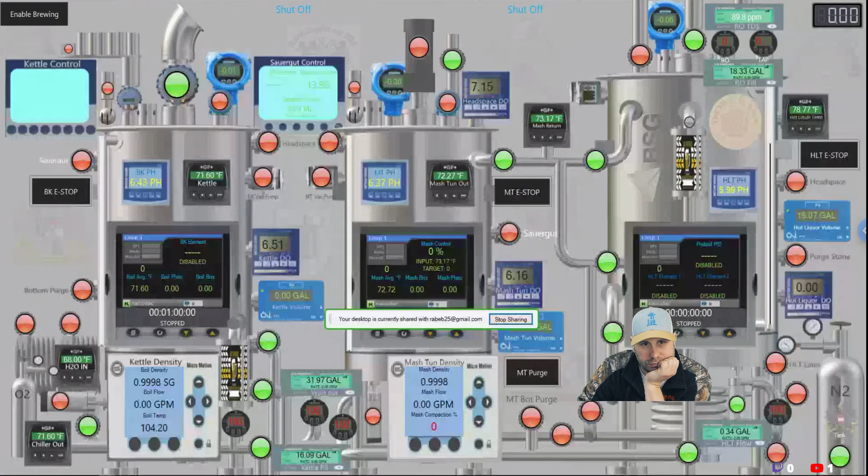Hopefully everybody can see that, I think you can. You can see my cursor, I believe, as well. So this is the brewing interface. Every one of these little guys right here is a valve. Green is on, red is off.

We have DO sensors pretty much everywhere, in the headspace and in the middle of vessels, so I can track DO. In the hot liquor tank right now, there's 0.01 ppm of DO, or 10 ppb, so that's 16 gallons of deoxygenated water.

We might have to change some things. Actually, I think we'll just go to a no sparge batch, just because it's much easier. There's between 0 and 10 ppb of DO in the hot liquor tank. The hot liquor tank also holds a HERMS system.

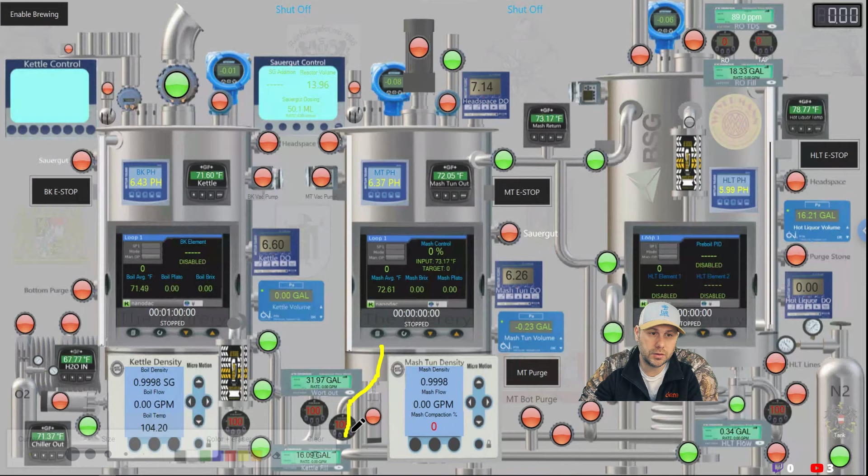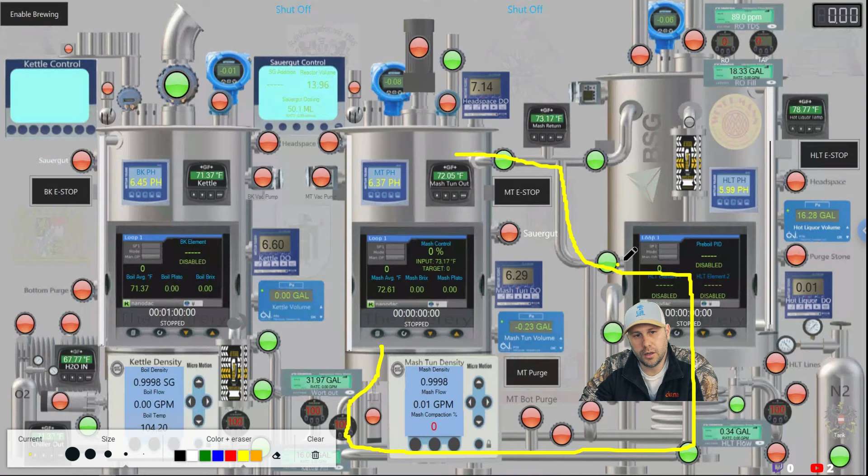The second loop of the mash tun takes the same path, pump out to a proportional valve so I can control flow through the mass flow, and then it forks. There's a 3-way valve that forks and can bypass the Herms. So I have 2 loops running basically at the same time, and this valve allows it to go either to Herms or back to the mash tun, so I never exceed temps. I never have to worry about that, and it works really well.

There's multiple temperature probes. There's one on mash tun out, right here. There's another one at mash tun in, at the T of the bypass valve, which tells us our wort temp. Then I run an averaging script between the top and the bottom that tells me exactly the differential between the two, and I try to get those as close as possible to stop stratification and all those good things.

The mash tun does have its own stir motor. This motor comes down and acts as a rake, which that's a horrible drawing, acts as a rake for dough-in and things like that to homogenize temperatures. So there's a hybrid in that.

All these vessels are sealed and pressure capable. They have pressure sensors in the top and bottom. These differentials also tell me the potential of a stuck mash or anything like that. That is this mash compaction right down here, which is based on flow and compaction here. So that's a neat thing.

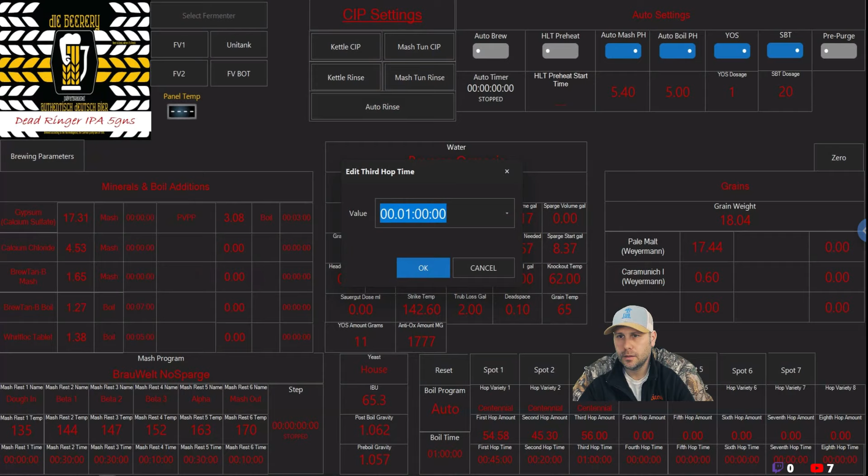I need to change this quick. How do we want to do that? See how this says third hop time an hour? That's not right, so I'm gonna just run back over to BeerSmith. Actually, I can just, for now, edit it here. So we want this guy off here because this guy was a dry hop, so that's gonna screw us up. So we want to delete that guy. Actually, let's cancel that, let me move this guy over here. We want to delete that. We want to delete that. And we want to change this guy to 0 right here.

Okay, all right, because this, like I said, this is just hot side process for today. We worry about that in a different area. So how this works now is, you can't see a cursor, I think I can actually, let's see here, doesn't allow me. So remember I told you about this little guy up here, select fermenter. So the cool thing that I built into this system was...

Give me a second, Jeremiah, okay? The cool thing about this BeerSmith import and the way I set up my automation is this one import takes me from brew day to the keg. Well, to serving actually. And so there's these little guys that help follow the recipe along.

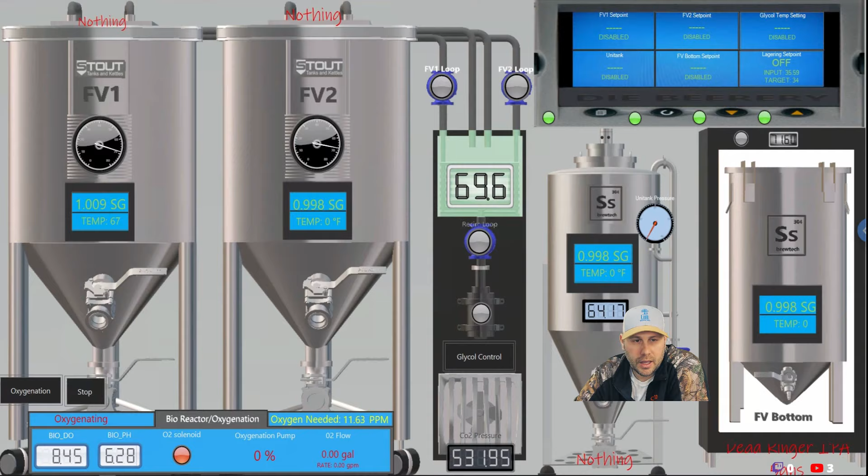This little guy now says the beer. And when I'm ready to start fermenting, when the beer is in the fermenter, which has its own tilt and volume and all that kind of stuff, it'll auto set the fermentation temperature. It'll know when to transfer over to the spund, so it'll alert me and all that. The spunding chamber is where I naturally carbonate all my beers—I brew German beers, so I naturally carbonate all my beers.

And that's via spunding. So it knows exactly when to alert me to transfer over to spund based on the gravity, how many gravity points, the desired carbonation level, all that fun stuff. You can see I have a beer spunded right on the left chamber. I have 4 different spund chambers that I can do.

There's digital pressure gauges, industrial pressure gauges on there that give me a readout. Right now I'm at 14.5 psi in this lager at 53 degrees, and that's a Pils. So it knows the exact pressure to set the spund. There's an electronic PRV on there with a needle valve, so if it does go higher, it will blow off that pressure slowly and then close the PRV and then maintain.

This dip right here, I pulled a gravity sample last night. So that beer will go into spund chamber number 2, where based on temperature and carbonation levels, it'll auto carbonate itself. It'll also keep track of the purge count and how many times the PRV opens and all that kind of stuff.

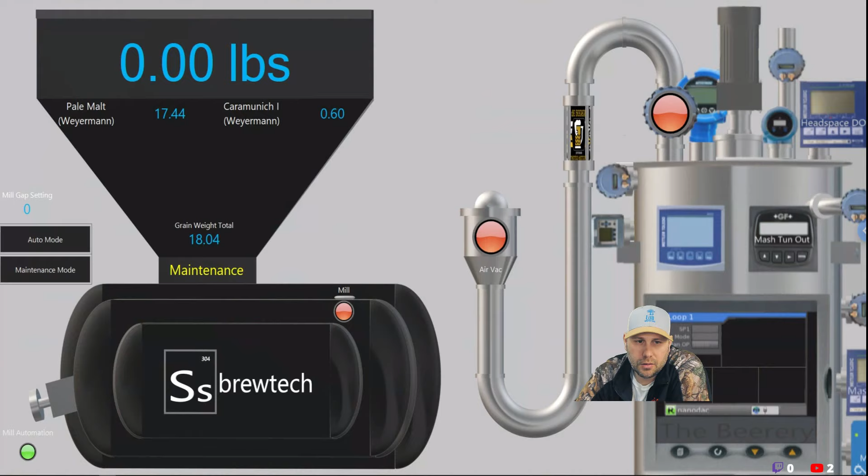I'll go back to the brewing side right here with our data, but we'll go back to our main page and get ready to start the brew. Jeremiah did have a question—how many grams of gypsum and calcium chloride? For this beer, it's 17.31 grams of gypsum and 4.5 of calcium chloride. Hopefully that answers your question. Basically what I'm going to do now is get up, go get that grain ready, and we will start the brew day.

The first thing I'm going to do is go back to the brewing, and since we are going to actually brew today, we're going to go up to the top left corner and click Enable Brewing. That's going to shut all my valves and get us ready to start to brew—a clean slate, no valves open except those that need to be. We have an interactive screen here: press Brew Start to begin, and awaiting purge commands. So with that, we are going to actually click Brew Start because we do want to start.

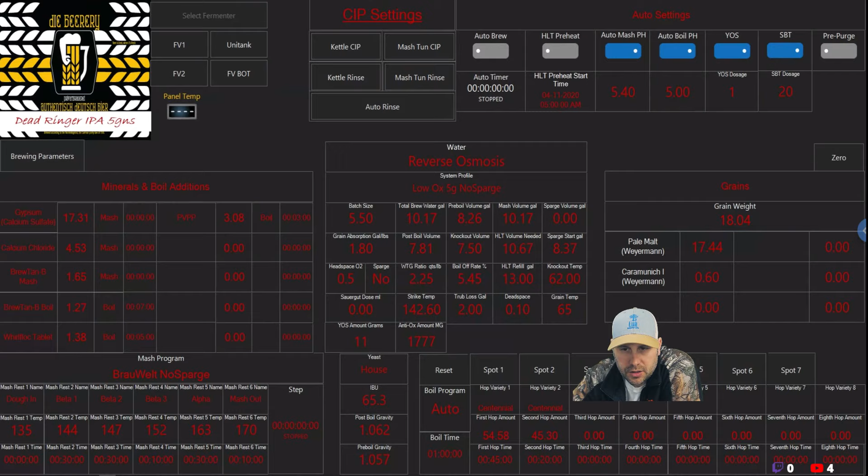So it looks like we're going to be about 65 IBU, post-boil gravity of about 1062. We're going to boil for an hour today. Our first hop addition is at 45 minutes, our second is at 20 minutes, and we will be doing a dry hop. Here's our kettle additions and our mash down in the left-hand corner, which is a step mash. Yes, I know I'm brewing an IPA, but I don't change my mash regimen based on beer style.

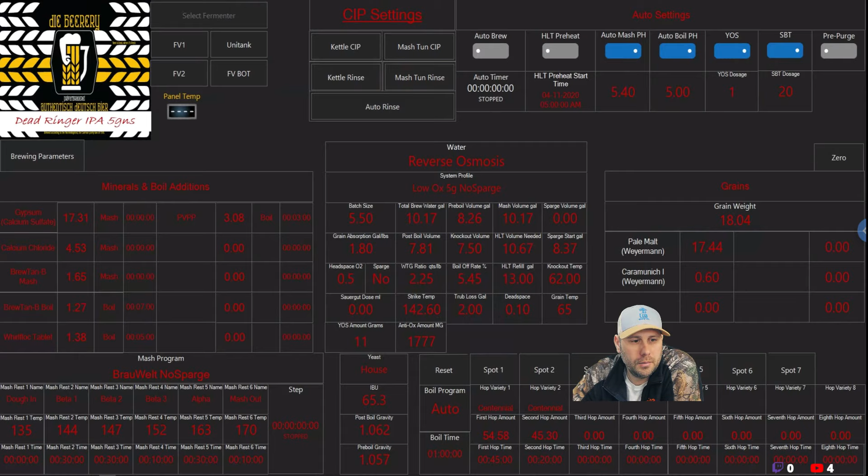So if that looks good, then what I have to hit is brewing parameters. Once brewing parameters are hit, all this data is locked in the brewing controller, and it's going to start asking me things like, am I ready? Yes, I am. False bottom - false bottom is in. I have forgotten my false bottom. You'll notice that I'm kind of a dumbass and I forget a lot of things. So that's why I built an automated brew system to make sure I am less of a dumbass.

Hey Paul, just saw your question. Well, I already have bins, and my thought process on my grain automation is I'm just going to use load cells like I do with the mill, and then these air vacs, which are basically little vacuums. You could basically use a valve, open the valve, put it on the bottom of the grain bin, and then once the valve opens, turn on the air vac and pull that grain out, and once that load cell reads the registered weight, we're good. So yeah, it's more than on the radar - we'll call it alpha testing right now.

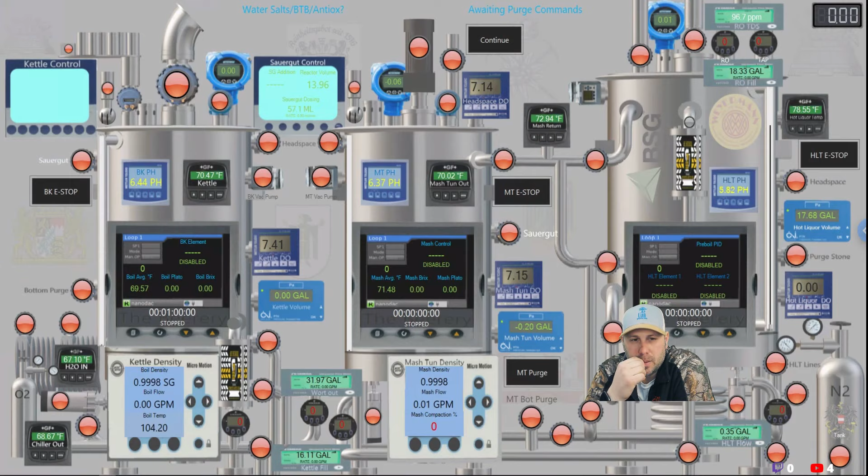I think somewhere I can give you a look inside of the brewery and what I'm doing. Today I am not using the grain delivery system, so I'm going to do that more manually. I'm looking at some different options, so it's kind of torn apart. I'm going to go to a bigger diameter pipe - I'm at 1 inch right now, but I don't like it. I'm going to go up to like a 2-inch diameter, so I have that kind of taken apart. It'll be a little bit more manual today, but that's fine. It's not like I got anything else to do or anywhere to go.

I'm going to go back there. I'm going to see if I can give you a view into the brewery while I am doing this. So let's see here... just bear with me while I do this. I just got to pop back. See if I can grab it here. There it is, let's see if I can make it bigger.

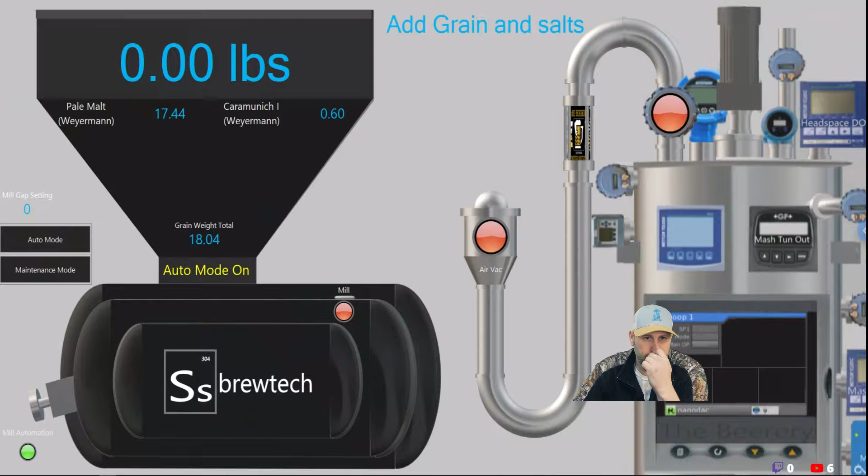Let's go and shut this guy off. So right now I am going to go actually start milling. I'll cut you back over to that stuff, let's see here. I'll cut you back over to the cameras. I have it weighed out already, I'm going to load it and start milling. So I will be right back.

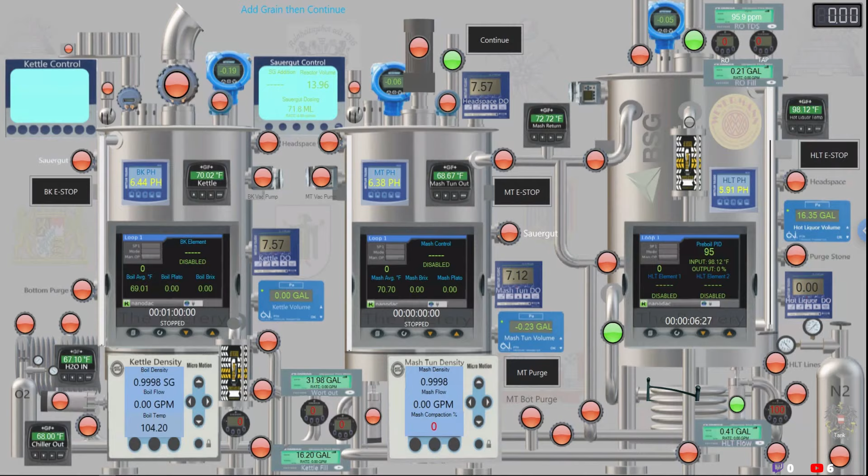All right, we're back. So grain was added in this case. Now we are just going to wait for our purging of the grain and purging of the mash tun, as you can see. Let me get my interaction here.

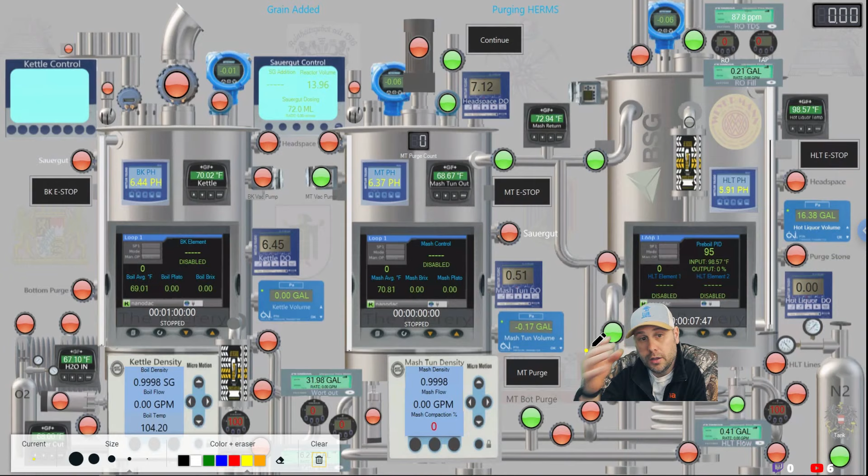Gosh, I'm getting a little glitchy here.

So it's about a 60-second purge to purge all that tubing. It's going to auto do it. Here it's purging the bypass now. So it purged the coil and all the herms with that.

We're pulling a vacuum as we're purging because it's coming out and being dumped back into the mash tun. So we're pulling a vacuum as we're doing that, pulling out DO. We're just trying to make the most efficient use of the purge gas, which in this case is nitrogen.

So we are now purged. All our lines are purged. This is a sealed vessel. Everything is sealed.

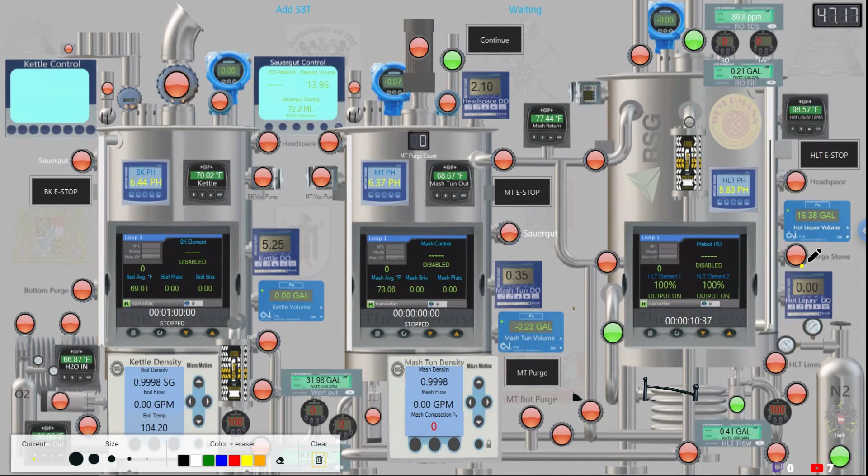All right, cool, so I added that. Now that that's added, we are heating to strike temp. Strike temp is going to be roughly 140 degrees, somewhere around there. Our temperature right now is 99.

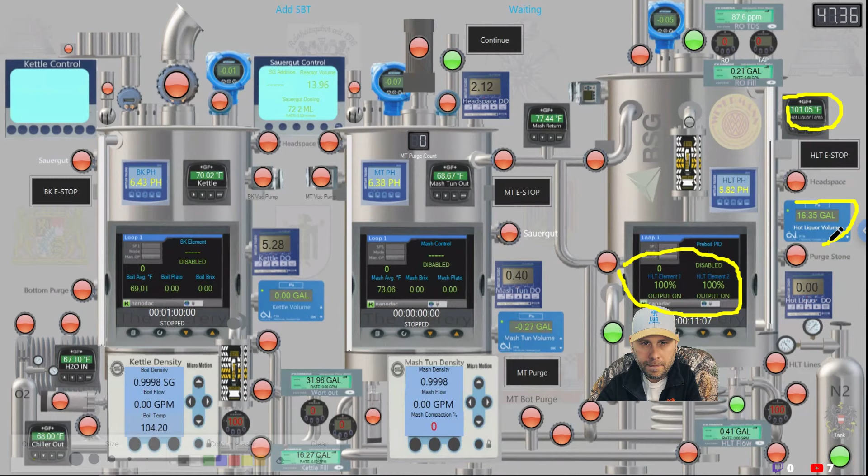We have two 5,500 watt elements in this hot liquor tank. This is a 30-gallon hot liquor tank, so it has 11,000 watts of heating power in it. It's half full right now, and we only need 10 gallons out of that, so no big deal.

What we're going to do is underlet those 10 gallons just like this into the mash tun, like that. And once we do, we'll be left with 6 gallons. I need about 13 gallons to cover my herms coil. No problem whatsoever, because I have an on-demand water heater fill valve right there, and it's going to come out at about 145 degrees. We'll be off and running.

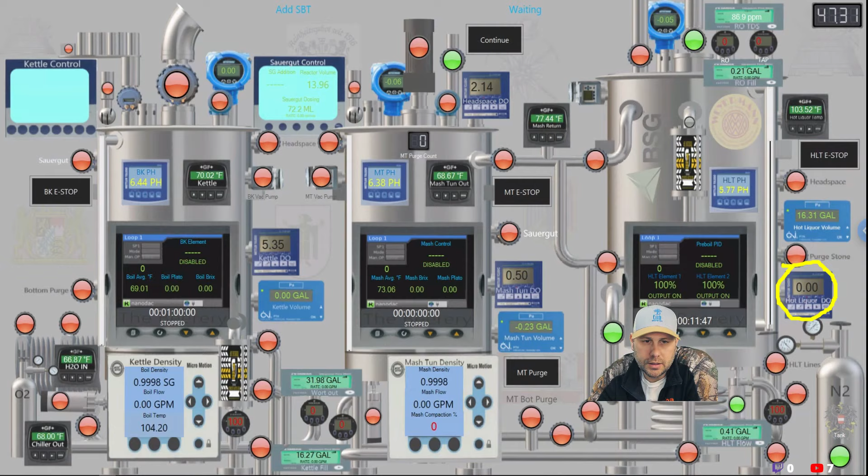So we are just kind of in a holding pattern right now. You can see our DO in our hot liquor tank is the most beautiful, as close to 0 as my instruments can read, which they are very nice. So that is nice and low, which is great.

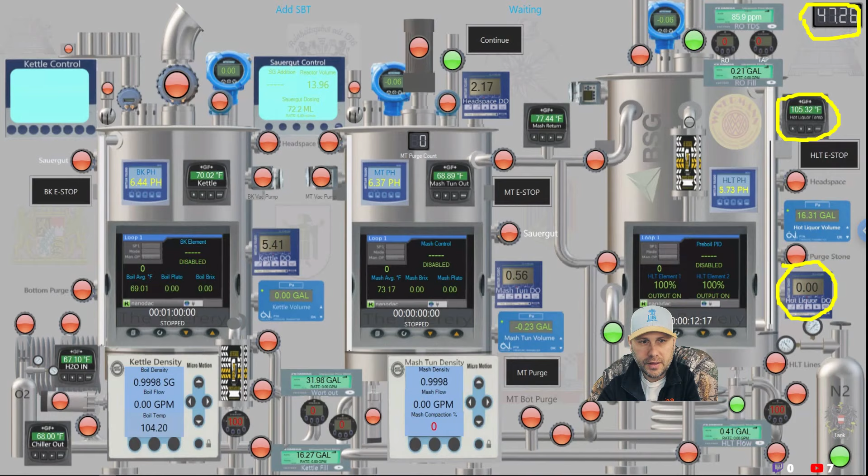We should be adding heat very fast because we are at nearly 50 watts. This is a watt meter. We are at nearly 50 amps. This is an amp meter. We are at nearly 50 amps. So this is a 60 amp system, and so we are good.

What else? I do have a manual sight glass. Things to know about me are I'm fanatically, I wouldn't say I'm OCD because I'm not, but when it comes to verification, I can get pretty crazy. So what that means is I'll always usually have a minimum of two, often more though, of verification levels to my brewing.

So I have a manual sight glass in the kettle, or in all the vessels, and that would be, the manual one would be right here, just a sight glass. It's closed, so it actually does go from bottom to top, and it's looped, so it can be a closed loop. So I have the manual mode where I can physically go look, which I do, and then I have two different modes of how much liquid is in there.

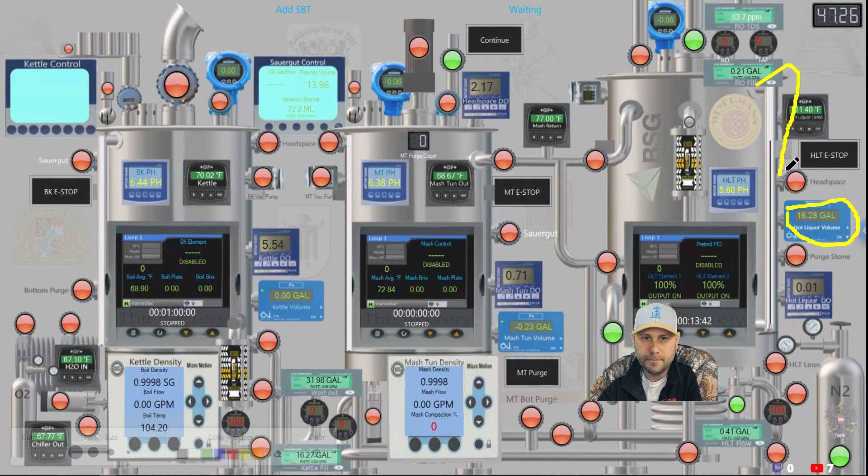I have a digital pressure gauge, and I have another, I don't even know the right word to call it, another gauge for backup. So I have these gauges, all these different gauges, manual, pressure, and ultrasonic sensor on the top. So I can measure all my different volumes 3 different ways and always make sure they jive.

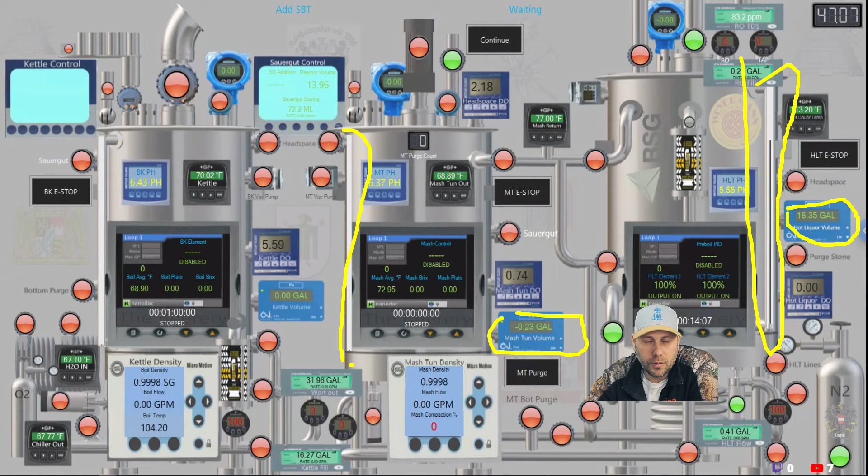The other thing I always do is I have flow meters on anytime any liquid enters the vessel and when it exits. So I have tons of scripts, automation scripts, that always monitor that what goes in and what comes out should jive with what's been there in one of these 3, 5, 10 different ways. So and I log all that, and so I know.

So we're at 116. We should be climbing. I think we'll see like 7, 8 degrees a minute or something like that is what we should roughly see. It's been 15 minutes since we started brewing. I got a timer that I keep with that.

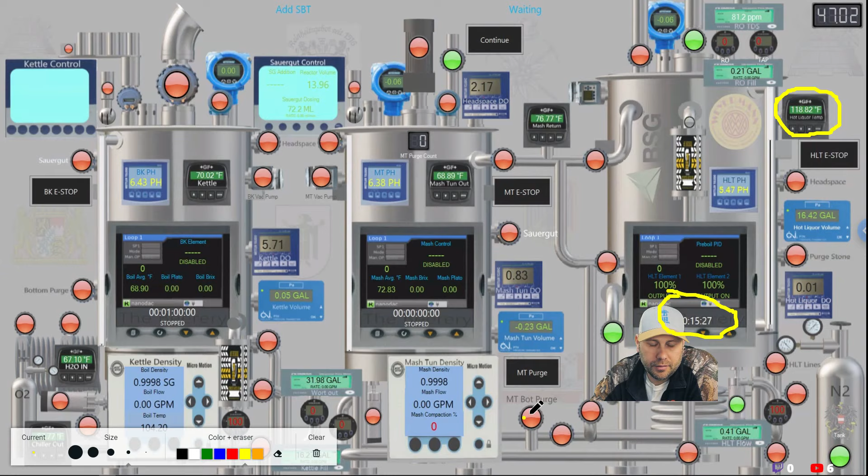I don't brew to save time. I don't cut any corners to save time. I don't have to. Short of today me adding the actual grain, I could walk away now and come back and fill a fermenter. So I don't brew to save time. I brew because I love the scientific process, and I love the automation side, which is why I have my system like I have my system, I guess.

I think strike might be 145. It's usually about 10 degrees above what my dough-in is. My dough-in, I believe, was 135, so it should be close to that. In the meantime, we should be purging this guy, and I wonder why we're not. Let me go check it out.

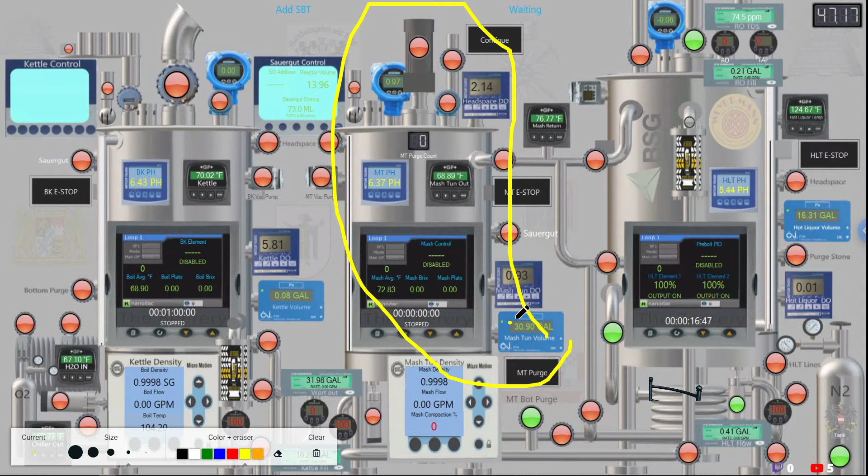Looks like the little one valve decided not to open. I don't know why it caught. I always keep a notepad with me, I'll have to figure out why it didn't open.

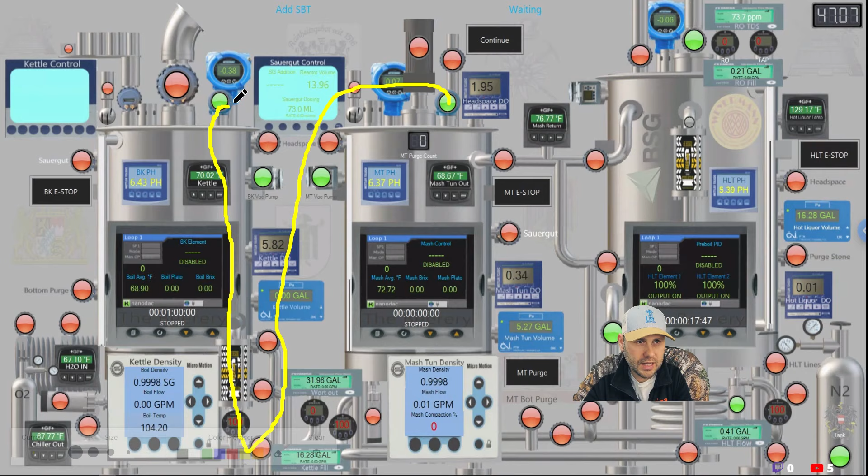So what's going on now? We had pressure up to about 2 psi. Right now we're doing a blowdown with the vacuum connected, and you can see the different pressure sensors are affected, there's some positive pressure there. We're blowing down via this PRV right here, and the loop of that, so we can conserve gas and make the most of our deal - it comes out here, goes into the bottom of the boil kettle, through the boil kettle to purge it, out the top PRV, through that pump, and off to the atmosphere. So basically I'm recycling the purge gas to be as efficient as possible. That's the purge loop, that's how that works.

Again, now we're at 130 degrees. Here's our pH of our water in the mash tun, or in the hot liquor tank, sorry. DO.

So we just ran through one purge cycle because that was a pressure up and a blow down, so now we have a purge count of 1. Now we're back on our pressure up cycle, you can see pressure increasing here. We hit our pressure, now we're doing our blow down and blow through. Once that completes and actually pulls a vacuum, you'll see this guy go negative. Then we'll close all the valves and do it again - that's what is considered a purge cycle.

So DO at the bottom of the vessel where the grain is.

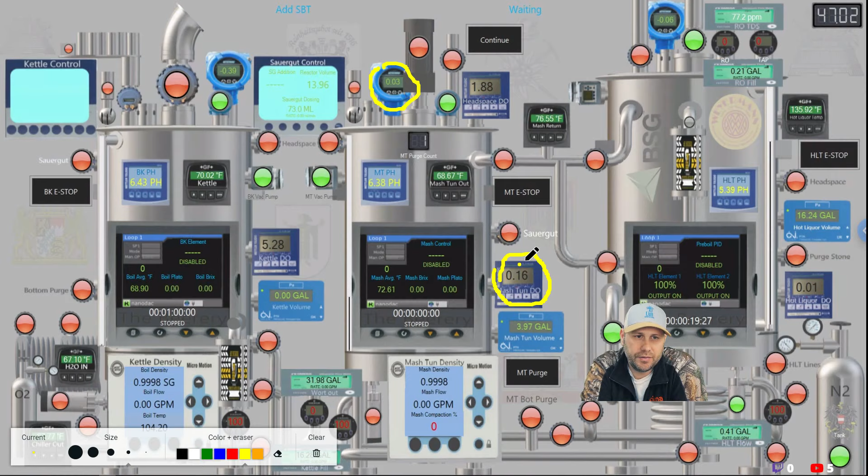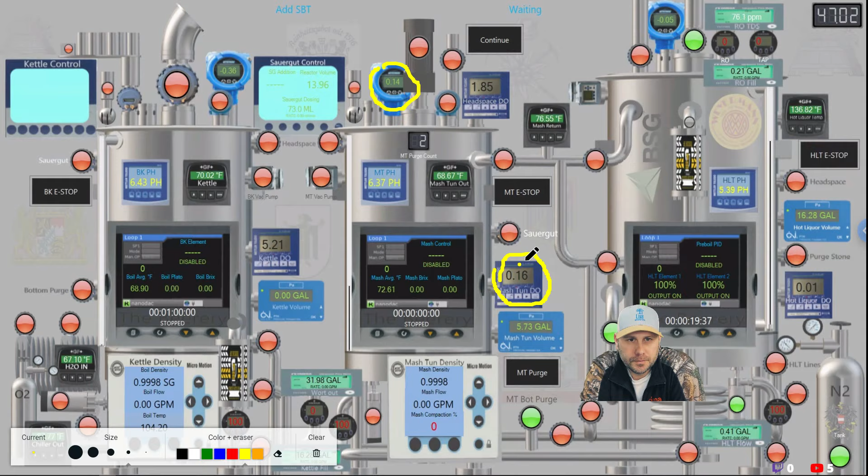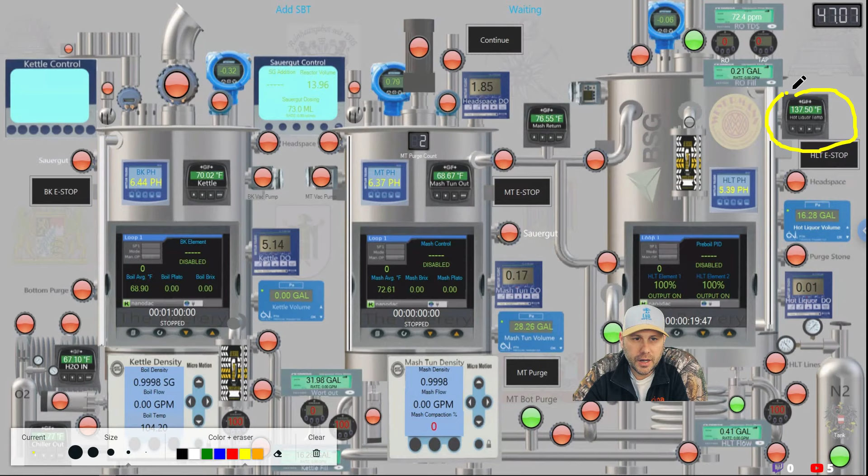So DO at the bottom of the vessel right now is at around 160 ppb, parts per billion. Once the bottom gets purged, the headspace will soon follow. In a perfect world, my DO is super low and my strike is ready, and everything progresses.

By all means, if you guys have any questions, speak up. I'm happy to answer anything you got.

You know, a decent amount. I have a giant tank, the biggest tank you can pretty much get from a welding supply place. I can't remember how big it is, a couple hundred cubic feet or something like that. I'm pretty efficient with my purges and reusing of gas, so it's not too terribly much, but it's a decent amount. I have to fill my tank probably - I try and brew at least once a week, and so I have to refill my tank about 4 or 5 times a year.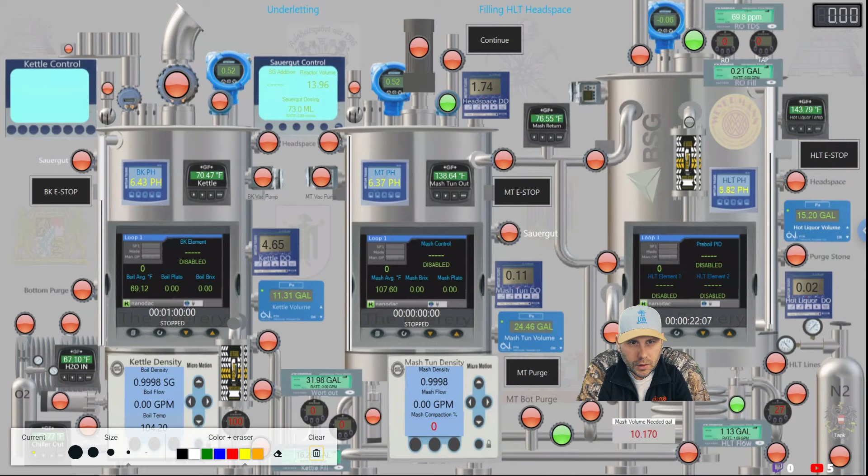So we purged to about 100 ppb roughly in the mash tun. We're underletting right now. We already hit strike temp, so we're already underletting. Here's how much we've underlet, here's how much we're shooting for, and like I said, it's coming out like this, and then coming up into the bottom of the tun.

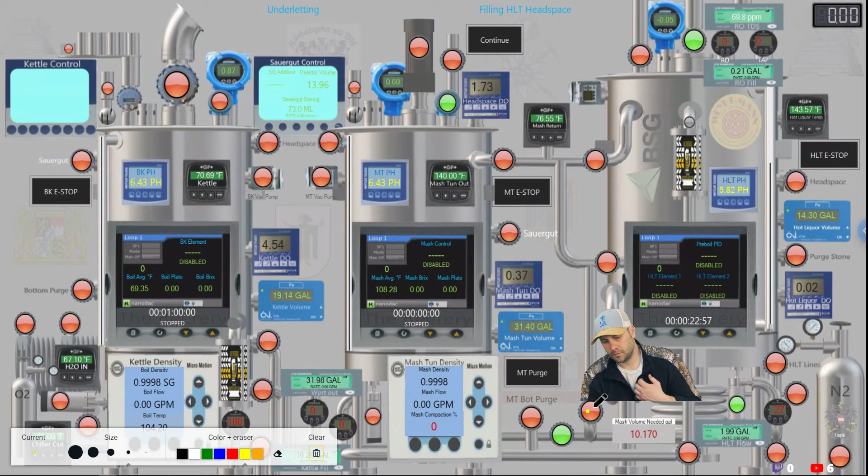Yeah, see the problem with nitrogen is I'm pretty sure there's no phase change like there is with the CO2 - I'm not getting liquid nitrogen, I'm getting gas, so you don't get the phase change. So you're just holding gas, and it doesn't go as far as you'd like it. That's for sure. But that's awesome.

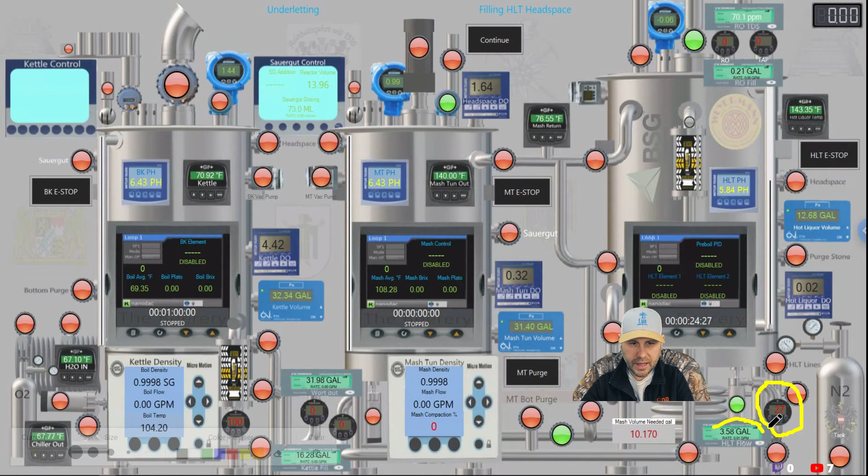Alright, so where are we at? We're at about - so I like to underlet at about 1 gallon per minute. There's a proportional valve here, I'm on a small screen so I don't know how clear it is to you, but this proportional valve right here is modulating the flow to try and hit about a gallon per minute. A nice slow underlet, less dough balls and stuff like that, and so once we get done, we will do a stir as well. It seems to work decent.

Do I control this from this touch screen? No, it's all well, yeah, so I can control it right now if I want from right where I'm sitting. Otherwise, there is a touch screen panel as well. So for instance, give me 1 second.

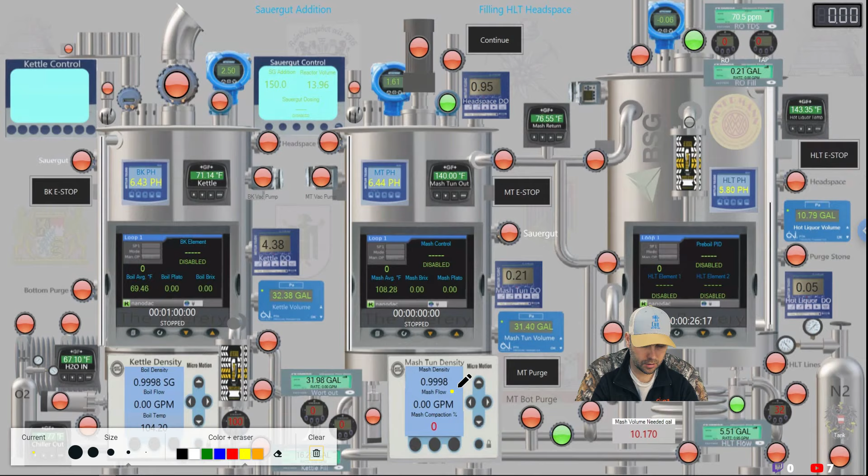Shoot, I just screwed up. Give me 1 sec here. Sorry, I'm a man, I'm trying to multitask. My wife's texting me here.

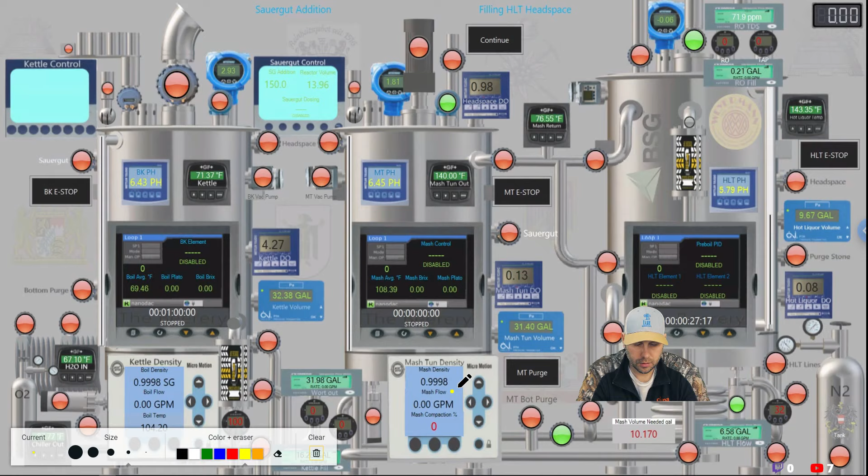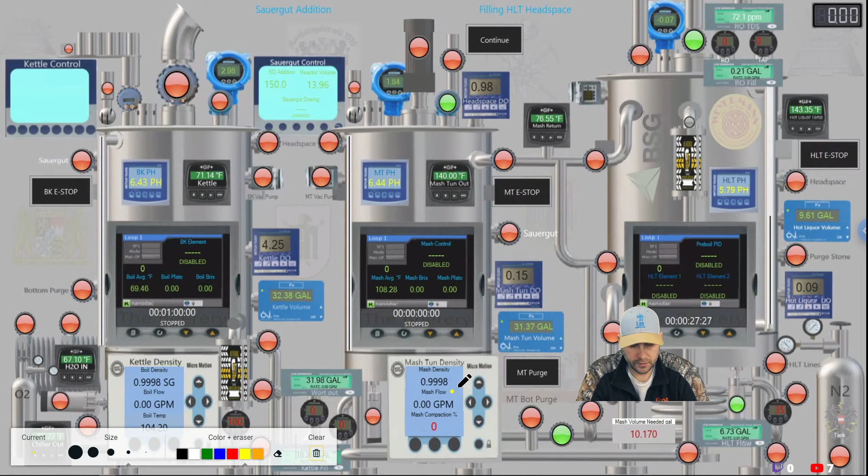Give me 1 sec still. So no, I can control it from here, or actually on the panel. I have a big control panel, about 36 by 48, with a 24-inch touchscreen that shows this same overlay. Yeah, give me 1 second. Are you familiar with BruControl? Okay, 1 sec, 1 sec. Where am I? Where am I?

Okay, your full undivided attention. So yes, I can control it from here. Let me show you how I do that.

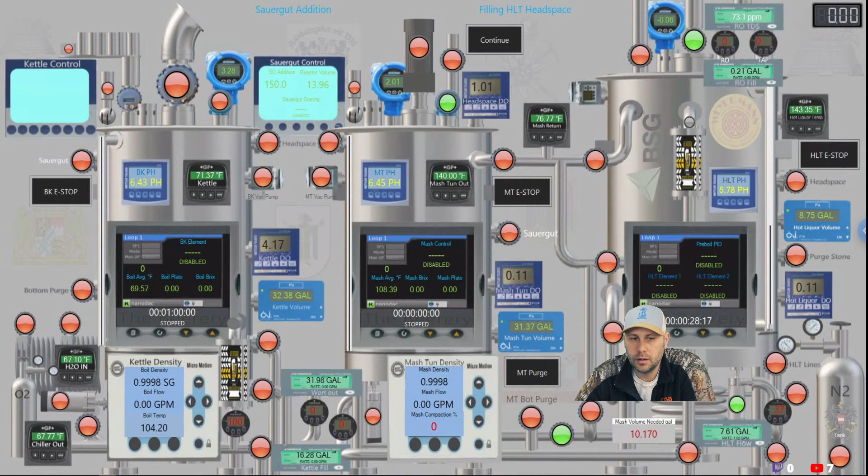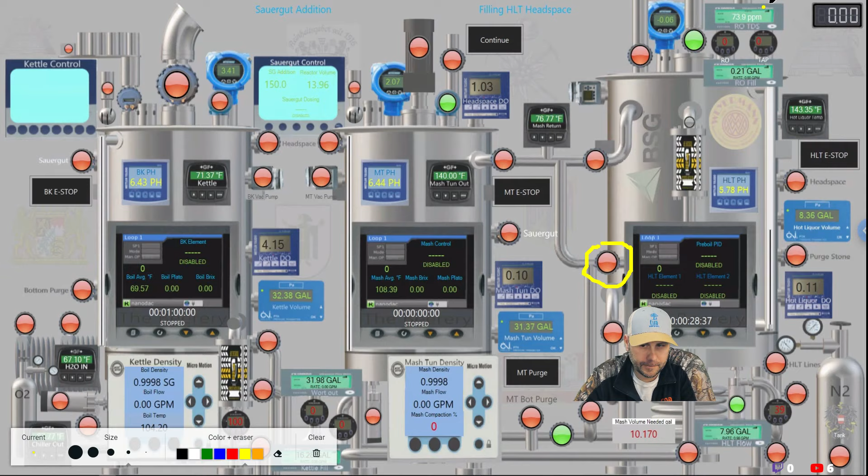I will be turning on, shoot, let me go back. I will turn on, how about I turn on this valve. Turn on this valve and not leave your sight. All right, you see it go on, turning off. So yes, I can remotely control it from here, and it can be controlled from the panel. Let me go back to my thing.

Let me clear that. All right, so how does that work? It's a script, and that script tells it if the flow, at the rate, my thing kind of glitches. So you have your totalizer, which is 8.6 or 8.7, that's the total. But you have your rate down here. So that script is based on the rate.

It's a looped script that basically says, if it is not at 1 gallon, tick this proportional valve. If it's below, tick it up. If it's above, tick it down. That script runs in a 5-second loop, continually ticking up or down based on the feedback it's getting from right here. So that's how that works. It's just a loop of a script that says if the flow is above 1 gallon per minute, lower the valve 1 tick. If it's below, vice versa. So it's a really simple script.

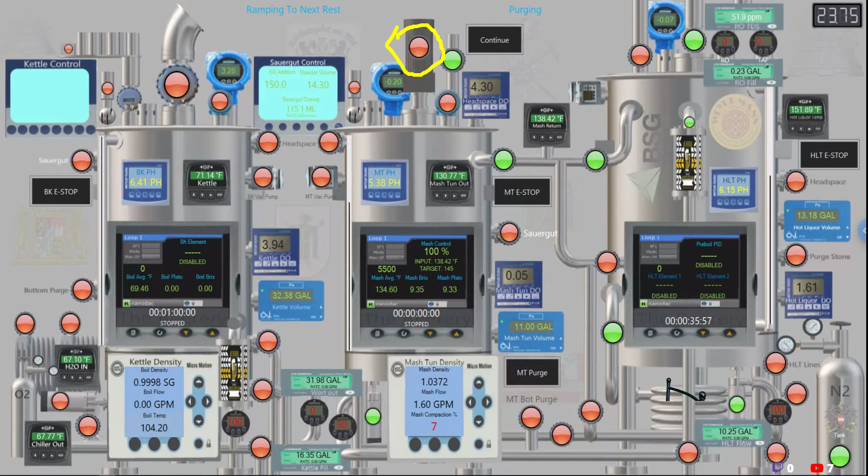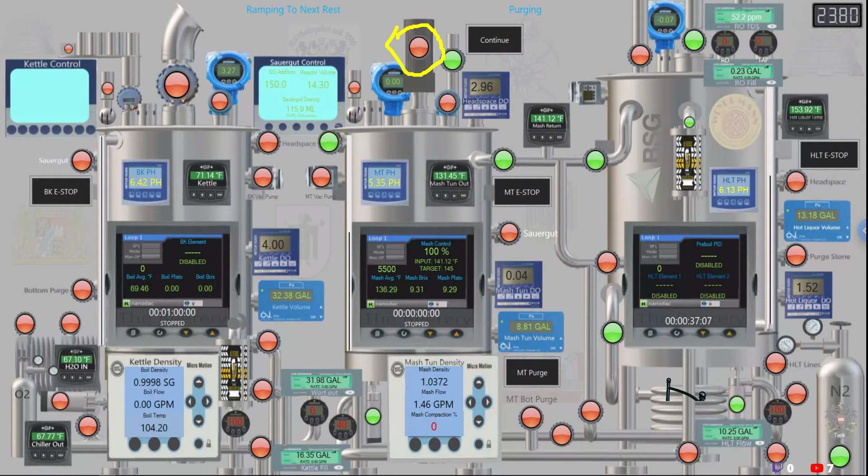And give me 1 sec. Just use 1 gallon per minute.

No, I usually keep right around 1 gallon a minute, and you could set it to whatever you want. You could have a script, you could have buttons that say predefined levels, like let's say you want to sparge, you want to fly sparge, and you want quarts per minute or whatever. It doesn't matter, it's irrelevant. You can have whatever measurement you want.

What else we got? Downloading Brew Control now. Yeah, box.

Yeah, cool, yeah, I mean, I love Brew Control. I'm not paid, I'm not endorsed by them in any way. I love it. It's a fantastic brewing control program for mild or wild.

So we're just recirculating right now. We are going through the HERMS because we're ramping to our first actual rest, which is going to be right around 144, 145. So we're going through the HERMS. So the flow process is right here. I don't know why it glitches out on me like that. And then up through the HERMS and then back out and through. So that's the control process right now.

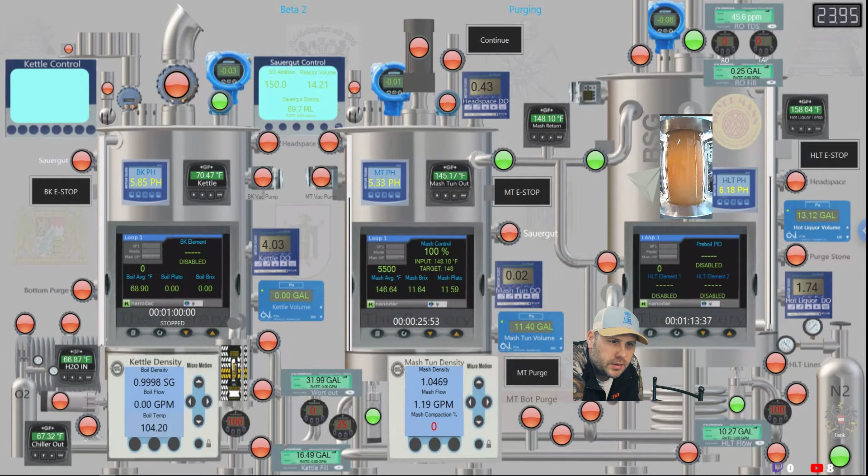Alright, well this is chugging along. I think I'm gonna go grab some lunch quick. We can just watch it - coming up on our second rest, we're at about 1.046. I do run conversions here, right here, for Brix and Plato, so keep an eye on those. I'll be back in a little bit.

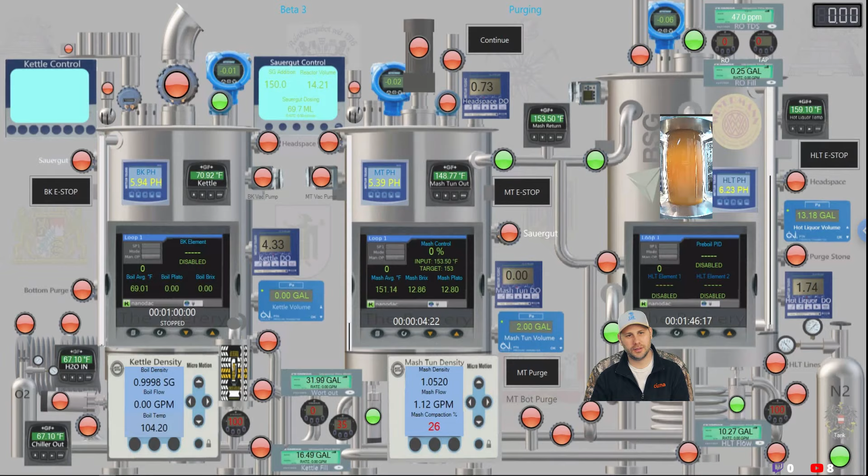Yep, I know, don't worry, I'll get up and I'll go check it just to make sure it's still there. Here, I'll check it right now, make sure it's still there.